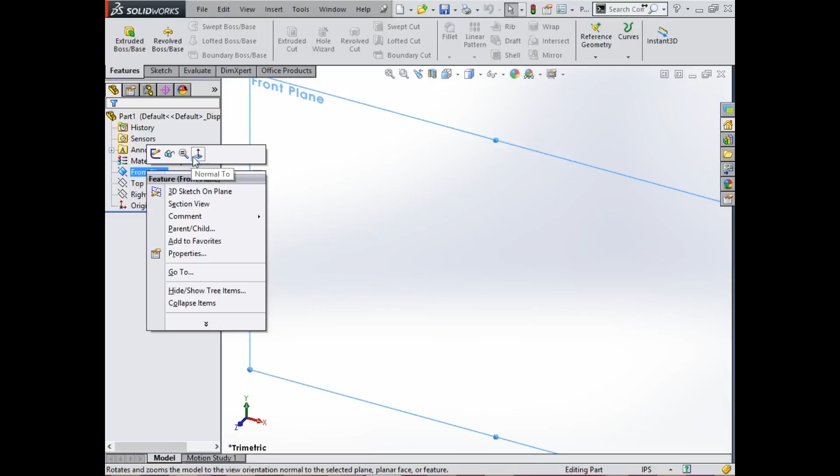So first, we're finding the front plane. Select that, and then right click, and bring it normal to, which just means you're looking at it straight on.

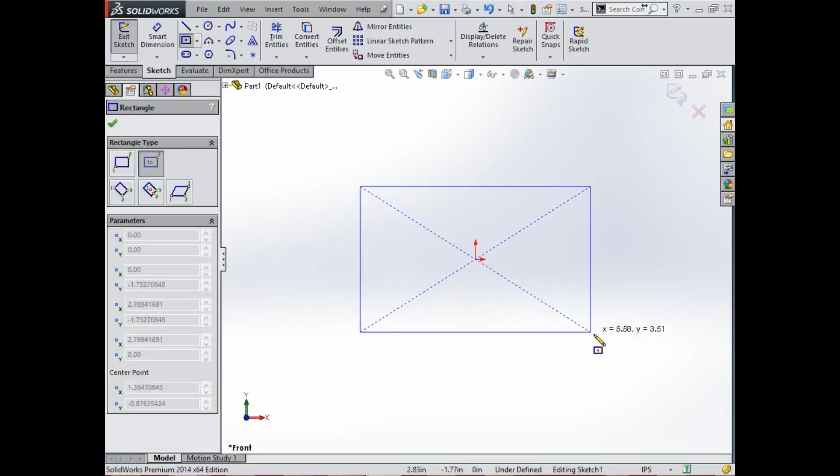Then you're going to sketch a rectangle to the center rectangle—you can see that. Don't worry about the dimensions initially, just hit OK.

I'm trying to fix the center point to the origin, which isn't really something you guys need to do necessarily right now.

Once your rectangle is drawn, while you're still in sketch, go into smart dimension and dimension your rectangle, dragging it to the other side.

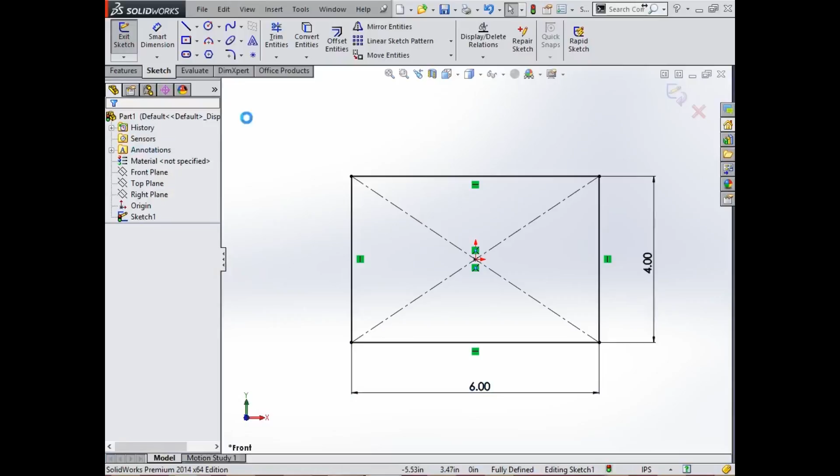The next thing we're going to do is go into features and extrude it, which means you're going to make it actually three-dimensional.

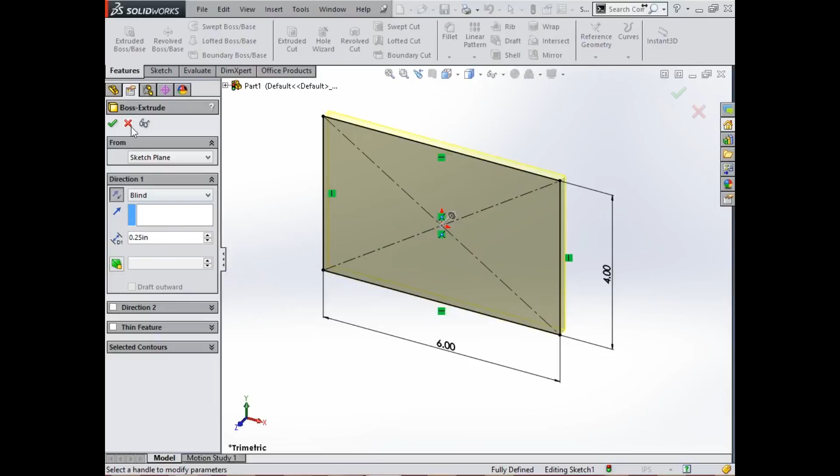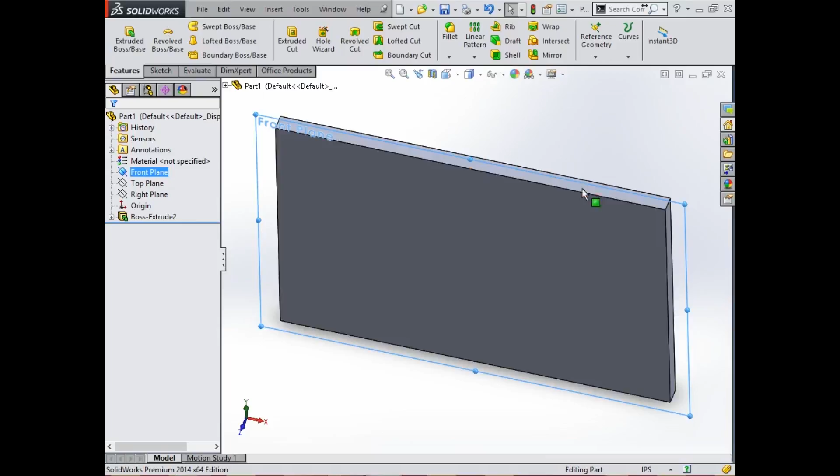The next step is you're going to select the top surface of your base. This actually is the top surface that you're looking for.

Then we're going to create a plane. This right here is your reference geometry, and you're going to drop down and select plane.

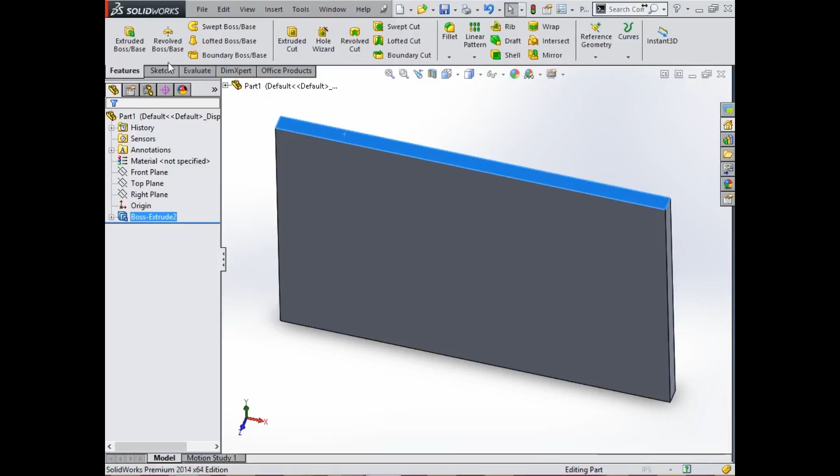Maybe... there we go. Okay, so the flip—that was the question I had earlier.

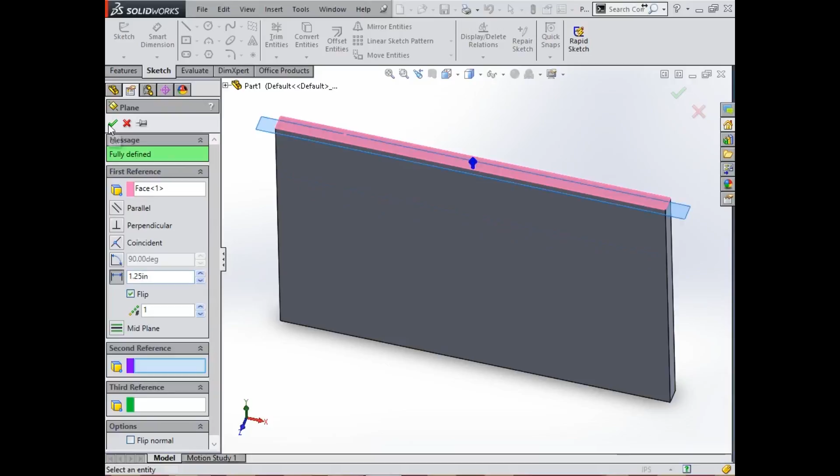This should be 1.25, and we're working in inches—this whole thing is in inches, by the way.

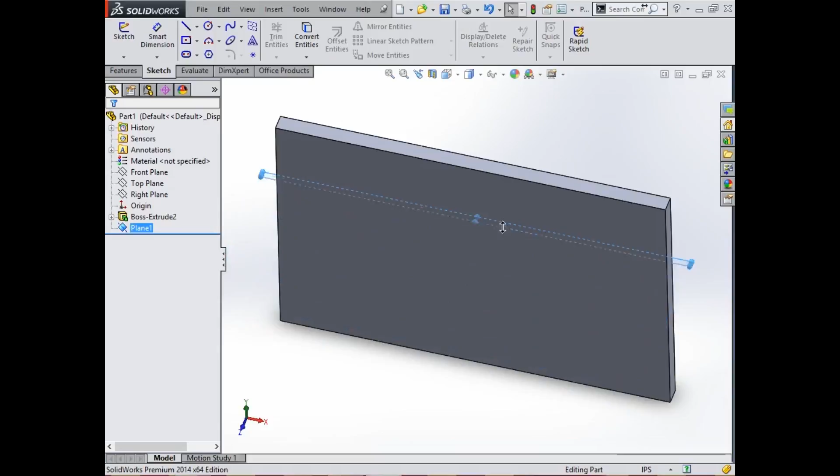Right here, we're just going to drag the plane out to make it a little bit bigger. There's not a specific size that you need to make it.

How's everybody doing? You guys are quiet—that either means you're doing it well or you're stuck.

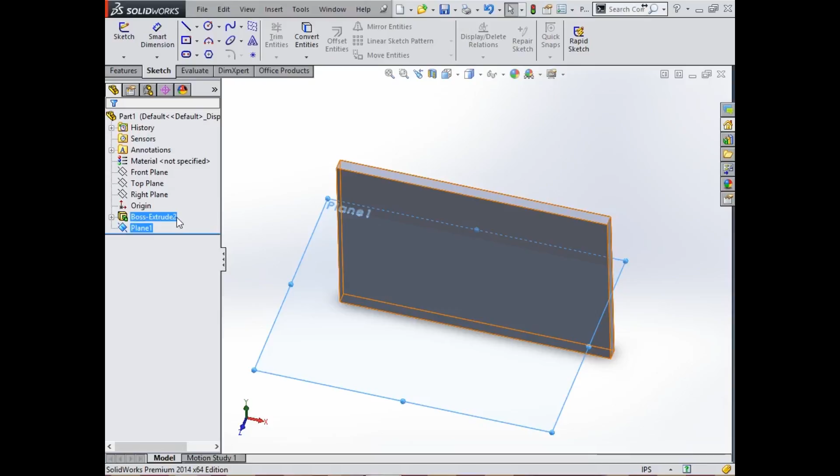Okay, so we're on page 96, and it says we're going to switch to the top view. Right here are where your views are. Did everybody see where I went?

Pretty fancy, you know.

Then we are going to sketch a line, but actually a center line. Right here, there's a drop down and you just hit center line. You want to start back here.

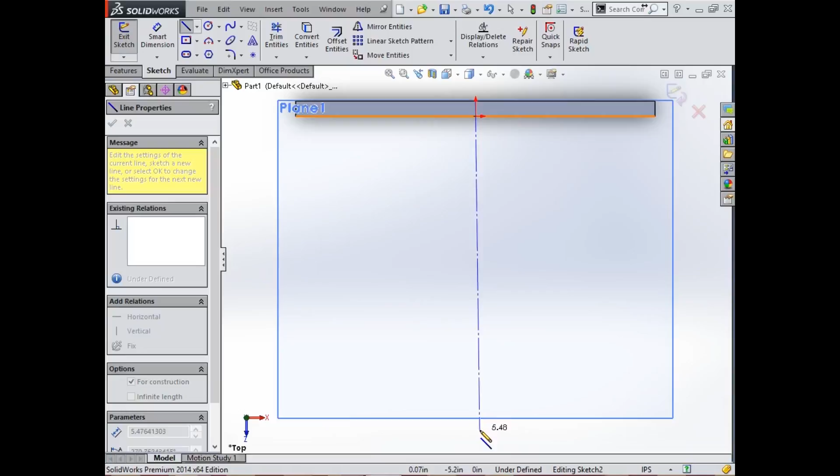See how on my mouse it says 90 degrees? It lets you know if you're just a little bit off to the side. You want to be able to see that 90 degrees, which I did not do correctly.

So to delete that line, I just right clicked on it and scrolled down to delete. And then I'm just going to redo my center line.

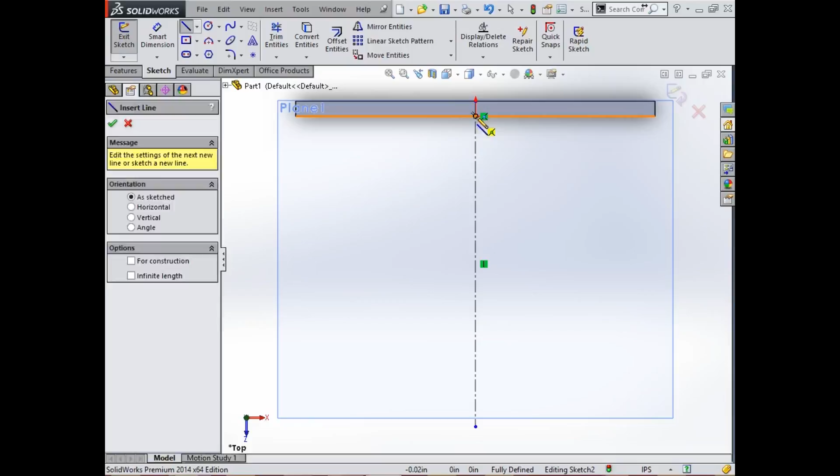Okay, and then we're going to draw another line, this time just a regular line. You want to start right about here, you see how it's called snapping to because it's got the little symbol next to it. So you're just going to draw the line out. How far out you draw isn't important right now because we're going to dimension it later, so just make sure you're following this path. You know you're on the correct path because these little symbols, see how it's in yellow and green? Those symbols show you that you're following the line path.

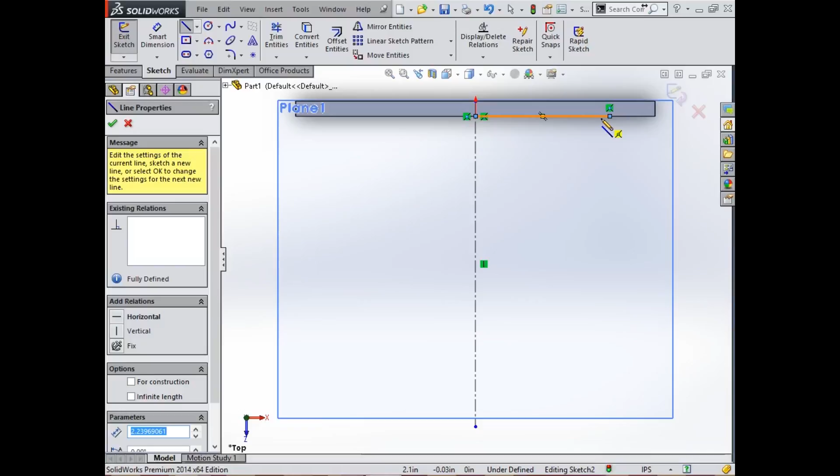And then we're going to draw another line at the edge of this one, at an angle. Doesn't really matter the angle, doesn't really matter the length, because like I said, we're going to dimension it in a minute anyways. And then you're going to hit OK.

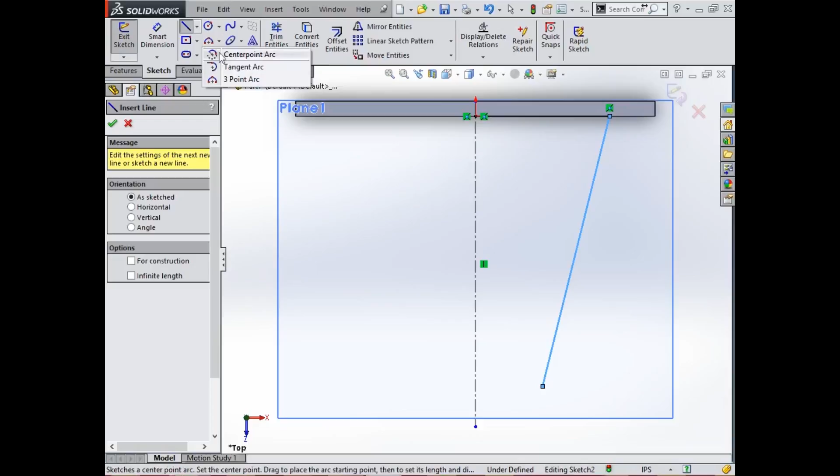And then our next step is the tangent arc. So you're going to grab the end of this line and go to the end of the center line. Well, I guess it doesn't have to be the end, it can just be a point on it.

Okay, so this is when we're going to start fixing our relationships, and what that means is so that when we start adding our dimensions, it doesn't change it, right? Doesn't make it all wonky.

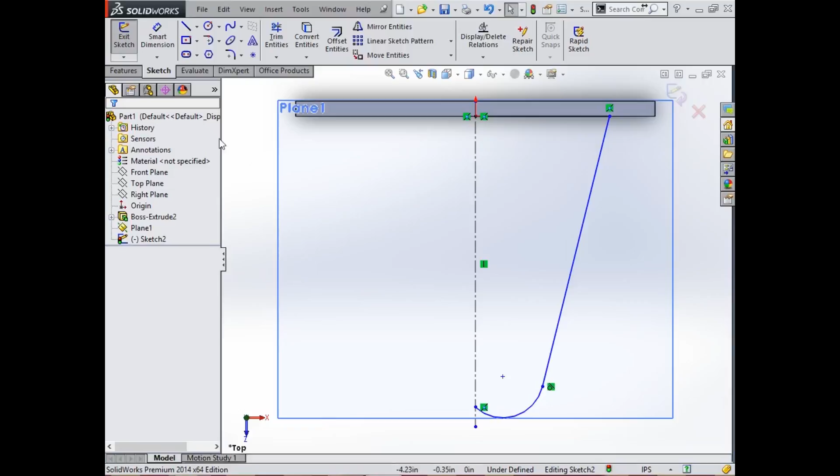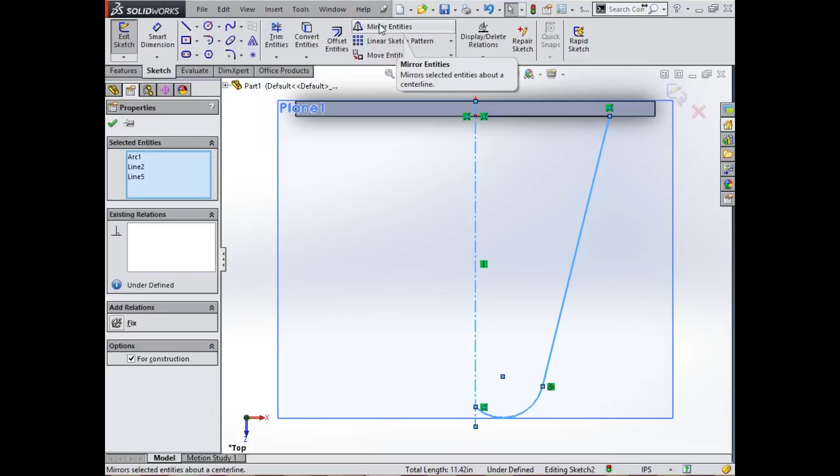Okay, so we're going to push the control key so we can select the center line right here, this line that we drew right here, and this arc point. Yep, and you'll see that it shows that. I lied though, you're going to hit mirror. Hit control, select all those things, and then hit mirror entities. And then you should have an exact replica flipped on the other side.

So next, and some of you have already done this, which is totally awesome, we're going to make this so it's concentric. I'm actually not good at pronouncing that word, so I just kind of skip it. Concentric? Concentric. That thing.

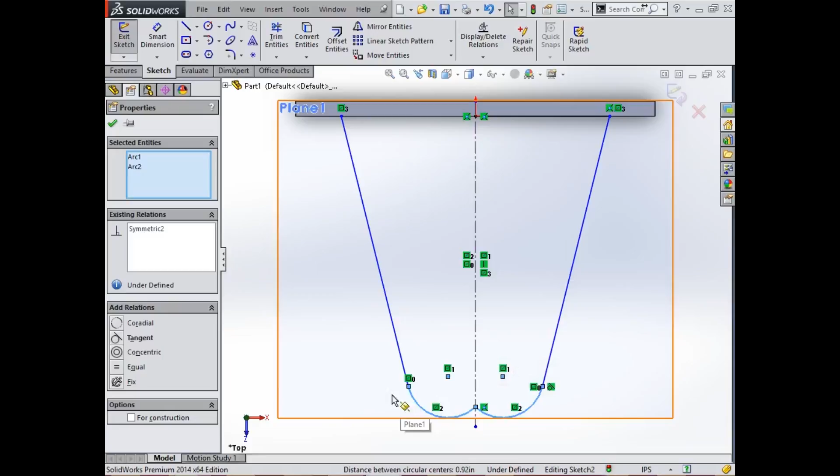So you're going to hit your control button again so you can select these two, the two arcs, and then you can see it right here, the concentric button. And then that should merge everything as one.

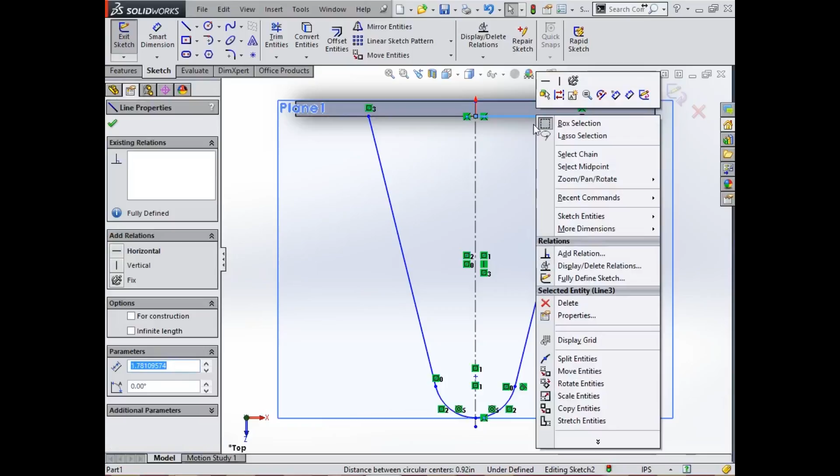And then we're going to close off the sketch. So like we have this line right here, I don't know if it will let you extend it or if we should just draw a new line, so you can try both ways. Because see this little orange line popping up right here? We need to finish closing the figure by extending it. So you can either try to delete it, which I don't recommend, or I would just say draw a new one. So start at that point.

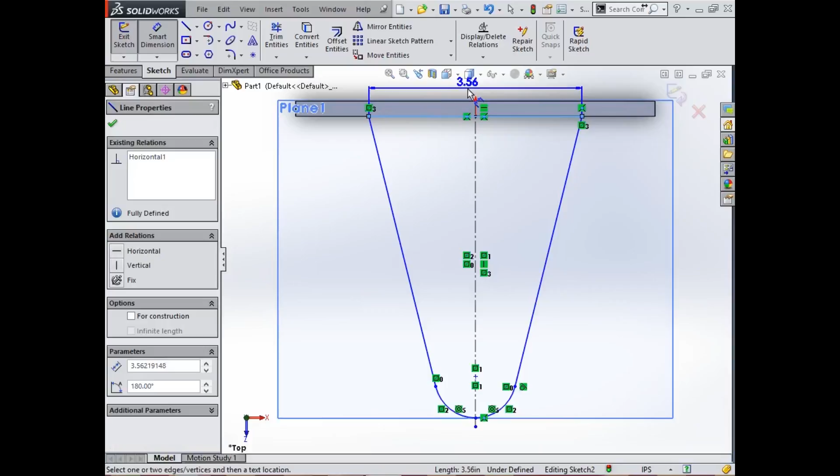And then from here, we're going to start smart dimensioning. And if while you're dimensioning it things are shifting or whatever, that just means the proper relationships didn't take while we were making it, and that's fine. Just call me or AJ over and we'll help you fumble through it. And the dimensions are all on the packet.

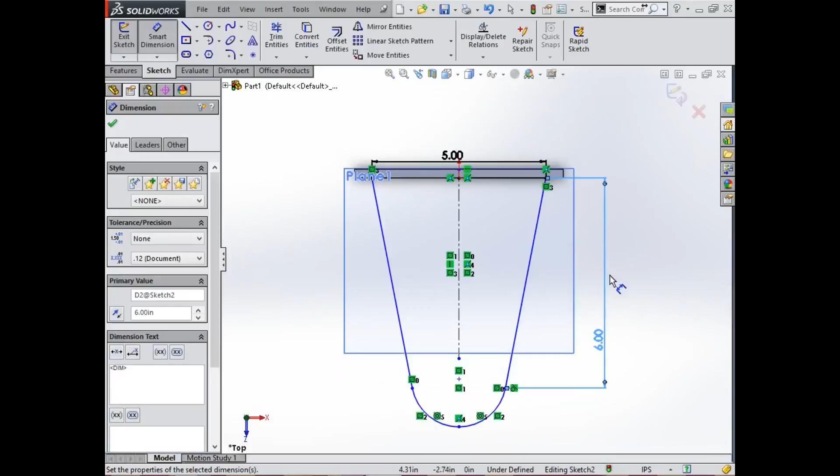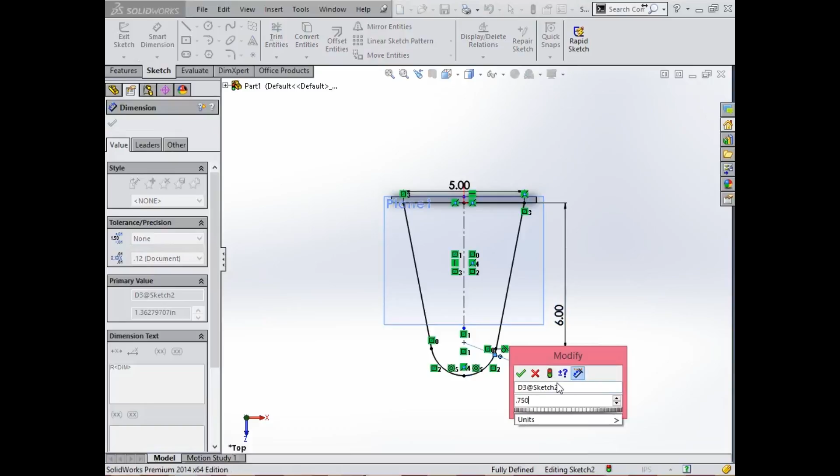And it's okay if your image goes outside of your plane, it's not going to affect it at all. Like with this one right here.

Okay, so you have to make sure that you are in your sketch. And then once you're in sketch, you can hit Smart Dimension, and then you just click whichever object you're trying to dimension. So: sketch, Smart Dimension.

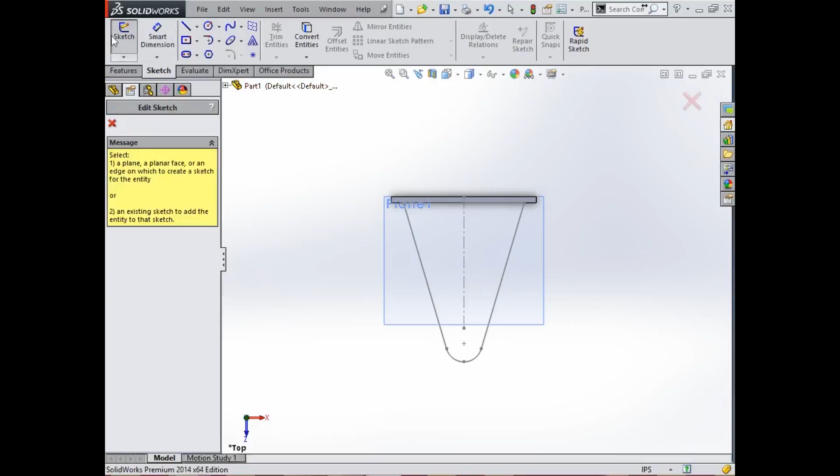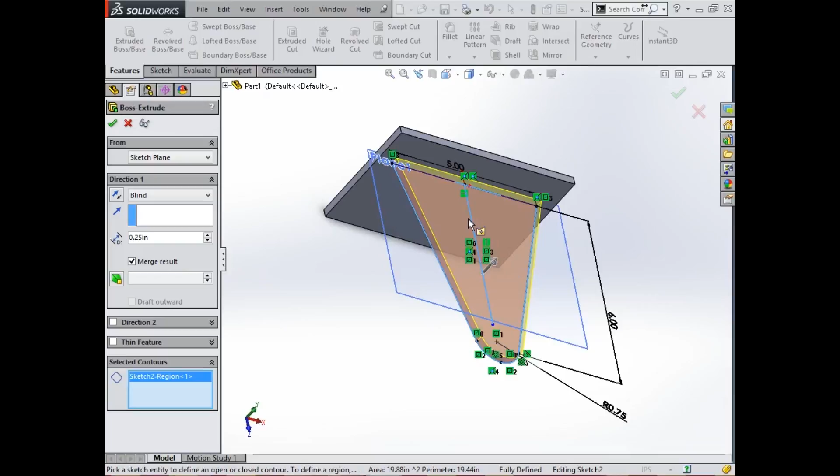So at this point we're going to extrude this. So we need to make sure that we exit sketch, right? Nope, you should still be in sketch. So all I did was hit the extrude button and then selected what I'm trying to make three-dimensional, and it was this part of the bracket that's sticking out.

Now I don't know if you guys can see that on mine, it looks like it's going up. We want to extrude it so it goes down. So if you see this blind button, that actually is going to push it down versus up. I'll show you guys that again: it's up, down. And then the dimensions on this are 0.25 inches.